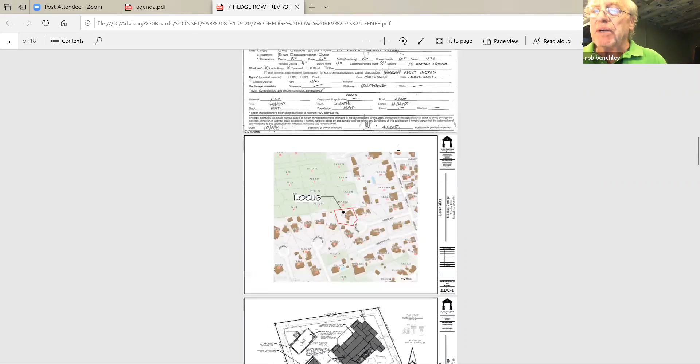We're moving on to... oh, this is an old agenda. The first order of business, which is... thank you. Mr. Chair, it's actually a new business agenda. Oh, it is, thank you. Yes, it's just mislabeled, apologies. I seem to have lost all the links that Kadeem sent me. I had printed them out, but I've lost them. So I'm going to be winging it here a little. Is this...?

It came from Kathy. Oh, okay, thank you, that's why I lost it too. Okay, thank you.

Lots of applications this week. Yes, we do. Fifteen. Ooh. Hedgerow. Oh, yeah.

Chair, can I make a motion to take the next application first? I believe he's waiting. Okay, absolutely.

Cottage... is that Cottage Ave? Yes, 8 Cottage Ave. Okay, good. And that's for the fence. Yep, yeah.

And this is... hi, it's Rob speaking. This is basically to replace or unify what's already there.

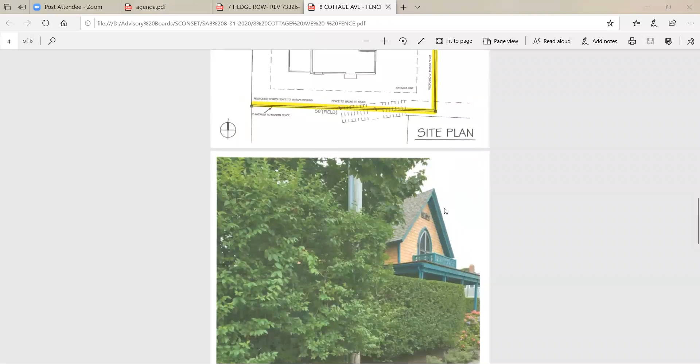You're right behind and next to the summer house, correct? Yes, that's correct. Thank you.

That seems reasonable to me. So it looks like it would be down this property line and this property line, and that property line? Oh, just the two property lines, okay.

Well, the other two property lines are on the streets, the two streets. So my question is, you can build a fence directly on a property line, is that correct?

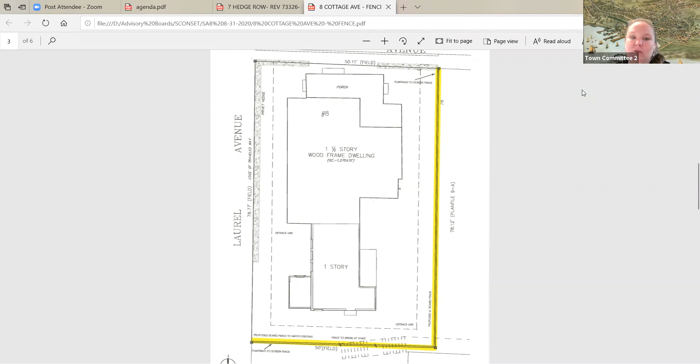So could you go essentially an inch off the property line? There's no setbacks off the property lines if that's what you're asking. Thank you, that's my question. You're quite welcome.

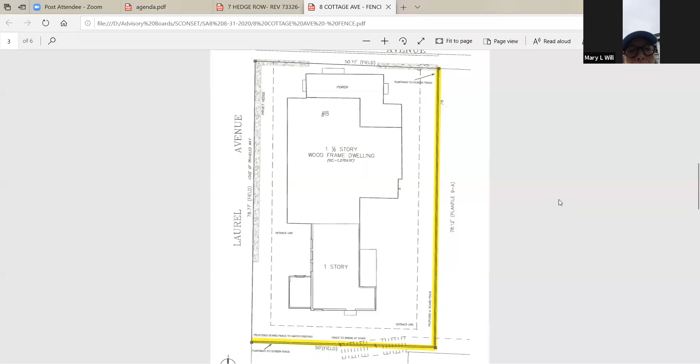How does this affect the path that's shown on the south lot line? That's a good question for the owner. Okay, so I'm sorry, I'm not sure what you mean by path.

There's a path that's shown. It looks like, or maybe it's something else, I'm not sure what that is. That is a staircase that leads into the second floor of the summer house for their dormitory housing. There is an easement that allows them to repair, maintain, or replace the stairs that cross over our property line.

Tom, I'm sorry, did you say that goes from the second to the third floor? It goes from the ground level to the second floor, where the employee dorm housing is. So how does that work with the fence there?

We would propose to bring the fence about halfway through there where it says fence to break at stair, and then probably pick it up under that first landing again and bring it back to the end of the property line, leaving some clearance space between the fence and the stairs so they could repair, maintain, or replace the stairs as the easement calls for.

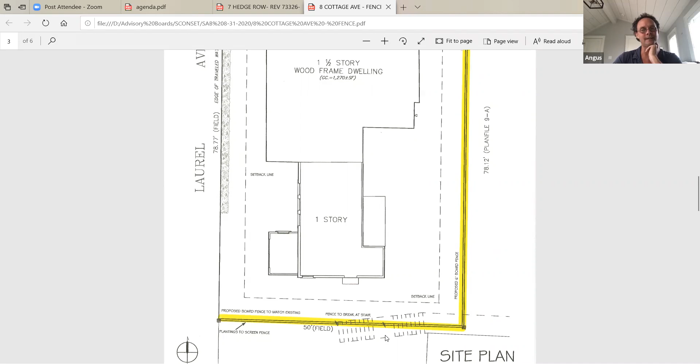We've got a quote from Nantucket Fencing Company, and I think the picture in your materials shows it as a lot more simple than what we would propose. We would propose to have caps on each of the posts, a board that runs along the top and bottom of the fence, and then caps on top of each of the posts.

That's what the fence builder quoted. I think it would behoove you to show exactly what you're going to put up, because I probably, like the rest of the board, assumed the fence would look exactly like this one, which is just a 1x6 plank fence with a gap. With what you're describing, I'd be happy to see a cap, but I think it's overdone to cap the posts.

Unfortunately, this was submitted before we got the quote in, where they told us exactly what they were planning to do. But if you mean by a cap, it's a horizontal board at the top of the fence and at the bottom of the fence. Is that what you mean by a cap?

Yeah, that's in what he has quoted, and as I said, some decorative tops for each of the posts. That top picture there shows the white picket fence beside the fence, that's on the screen now. The cap I'm referring to is what is on top of that white fence. It just covers the top of the fence boards, so it's not a rail, it's just a cap.

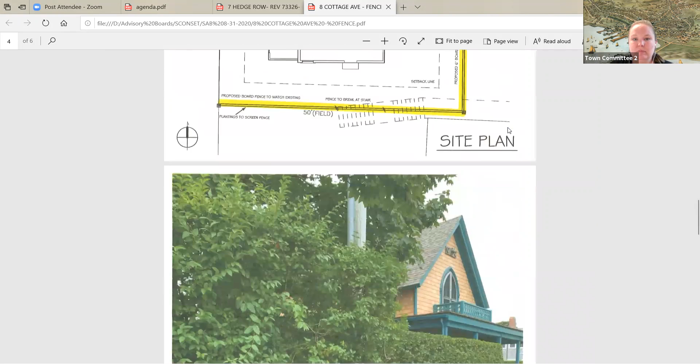I would recommend, if possible, and this obviously it's not going to help Sconset Advisory, but their comments would be, mention that. I would provide, if you can, some photographs of what this existing stair looks like, and email that to me so I can show that to the commission this evening, if we get to your part of the agenda.

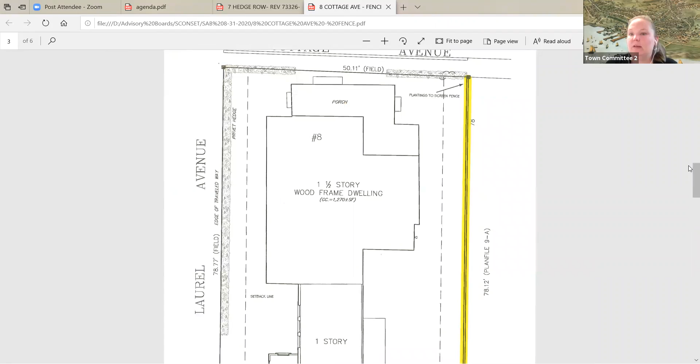Also, to the advisory board's comments about the fence, this obviously isn't what you're really wanting, so that should be clarified. And I don't see a detail. Usually there's an actual drawn detail of a proposed fence showing the elevation and details and all that stuff too. That would be beneficial if you get that from your company too. Okay, I'll get to work on that.

This is Caroline. Could I ask a question? Rob, could I ask a question? Oh, yeah, absolutely, sorry. It says plantings to screen fence within the yard? Yes, that would be within the yard.

So are you putting back the dead hedge? Well, actually, there is hedging there, so we may just build the fence on the outside of the hedging. It's well inside our property line.

Any other comments? This is Rob. Yeah, I would call this a defensive fence. Or I would say, this defense is a good place for a fence.

Yes, to defend and beautify. To defend and beautify. Perfect.

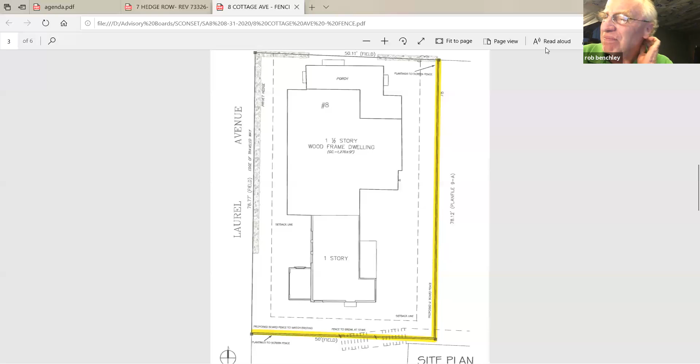Okay, then, Holly, I guess we have the right direction on this one, and we have no concerns. Thank you.

Provided there's a cap, right? Provided there's a cap. Right. Provided there's a cap.

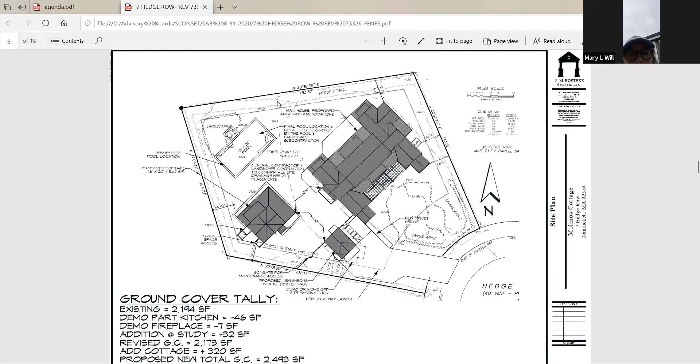Okay, so we'll go back to our first item, which is, it says 7 Hedge Road on the agenda, but I believe it's Hedge Row. And this is a revision for windows and some roof changes.

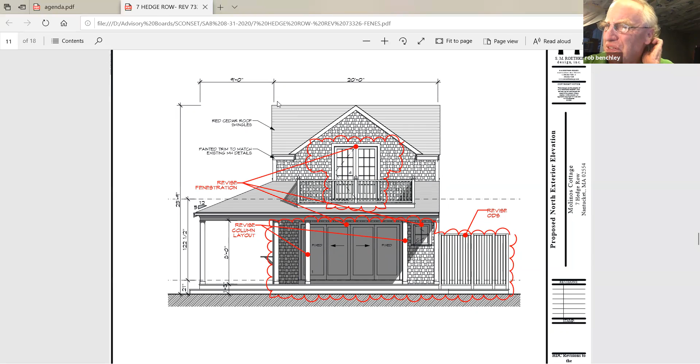And the original application, we looked at it this winter, I believe. Yeah. Okay, thank you.

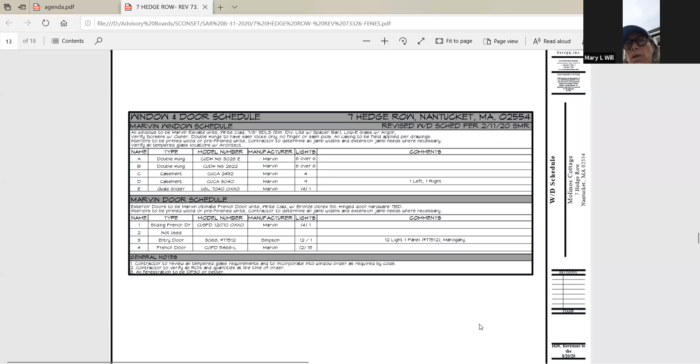We're looking at the cottage, I'm thinking. Is this the proposed one? I think this is the second building on the property, which is considerably larger than the original one. We talked about that at the time.

Is this a different applicant this time around? Do we have a different owner? I can only go by the agent, I don't know who the owner is without looking at the property line. This is Roethke. Oh, okay, so it is the Molinos. I thought I had a different name on it on the agenda, but that's all right.

I don't have a problem with the stoop or anything. That's fine.

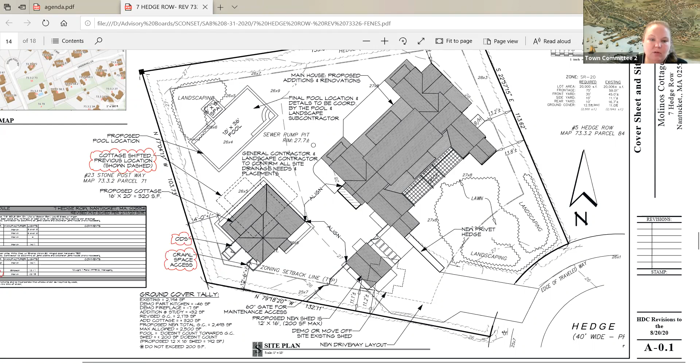So they've relocated it, you can see where it used to be. They're wanting to move it back into this corner. Yeah, away from their pool.

I don't see anything that stands out. This is Rob. Wasn't the application for window changes too, fenestration changes? I didn't see those. Yes, fenestration changes and a pent roof on that front elevation over the door.

Chair, this is Angus. I just have a concern about the windows. It looks like they're over the kitchen counter or something, and they look like single pane sliders. Yeah, ew. I'm not sure how visible they are, but that's extremely atypical.

This is Clement. I don't understand what that drawing even means. Are those sliding glass doors? They go all the way to the bottom.

This would be on the east elevation. Is that what we're looking at now? No, that's the north. Here. Oh, yeah, actually, are they? Oh yeah, they are, it says revised fenestration there.

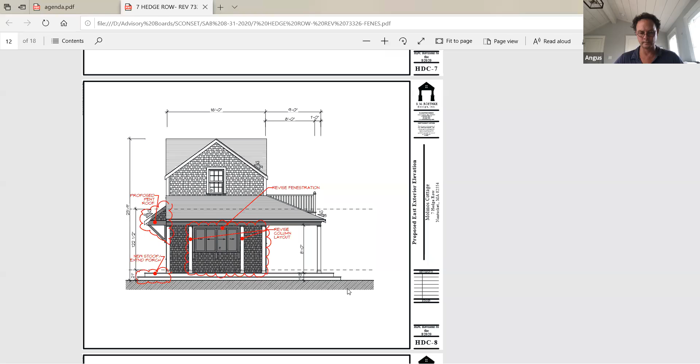Holly, do we know what was there before? Let's see what's in the packet. They should provide both, I think that's what they normally do at the end of the application.

It looks like a takeout window. Yeah, no, maybe it is. There's a little bracketed shelf outside the window when you look at the perspective view from the south. Oh, yeah, oh my God, it is a takeout window.

Is that facing the pool? Must be, so the grandchildren don't track in through the house when they come in for their lunch. Maybe a bar. Ugh.

Good eyes, Angus. Well, actually, wait, the pool side wouldn't be facing east in that location. East would be towards the ocean. Oh, yeah, actually it is, that is on the kind of pool side for them.

And then they went from these to... maybe, I don't know how the single light sliders got approved. I didn't think that was approvable, maybe because of lack of visibility. But both the sliding doors and windows bother me, they're just one big plate of glass. Agreed.

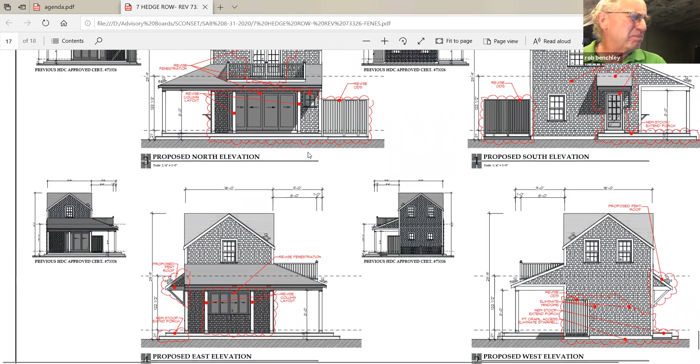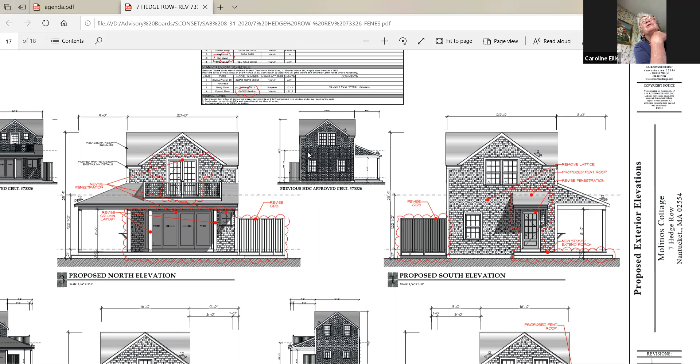But, well Caroline, they have a shelf and bar stools, so I don't know what other kind of window they could have. Oh, I see, do you see what I mean on the top drawing?

You can see little scallops of bar stools. I just don't know what other kind of window would work. Awnings would assure social distancing.

Oh, God. No, my concern is the single pane-ness, not the function of how they work. Okay, well then maybe that's what we should say. Should we suggest a multi-pane slider?

You want to guide you to what you want? Whatever light configuration would work with that, whether it's a 9 light or a 12 light or 4 light, something that would work with the other windows. Maybe 8 lights, 2 lights wide and 4 lights high, or 3 lights high, however the proportions work out.

Well, they've got 6/6s on the window above. These are kind of 2/3 the width of that, so it might work well to have 2 lights wide instead of 3 lights wide. Good. I think that's a good suggestion, Angus, myself.

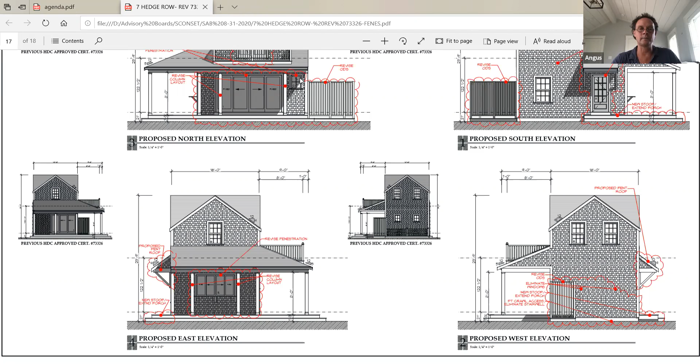So 4/4s. I mean, it'll look like that. It'll be what? It'll be 2 by 4, right? 2/2, right? It would be an 8 light casement, 2 lights wide, 4 lights high. Yeah, but not a casement, a slider. Right.

Hi, it's Rob here. I think those are great suggestions, and Holly, let's note that, please. And I'm also going to make a note that I've got all this stuff on my computer

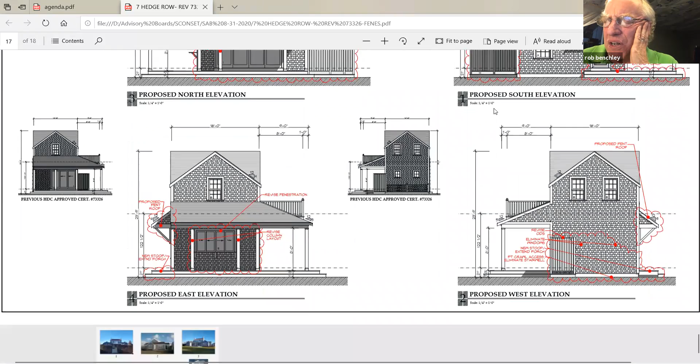That the applicants have submitted, and it takes forever for these images to load on the screen. And I'm just wondering, this is a bit of an aside, but I'm wondering if there's a way for them to technically flatten those PDFs before they post them. Angus, is that something that can happen? Can you flatten a PDF?

Because they've got a ton of layers on them and it takes 30 seconds for them to load. Possible. All I can say is, we receive them the way the applicants provide them, and we're lucky we get what we need for you all to look at and for staff to look at and the commission. Okay. So, all right, but I understand completely, because it looks like they're going directly from their software program instead of. Yeah, I know what you mean. It just takes them forever to load on my computer.

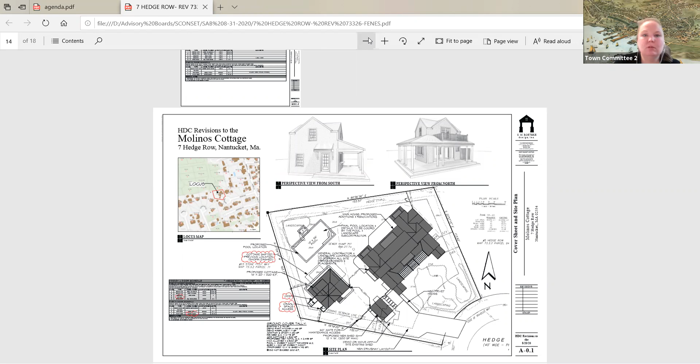Okay, so should we move on to 12 Lincoln? Sounds good. Everybody okay with that? Yep. Yeah. Thank you. Had to remember that there was a 12 Lincoln or a Lincoln out in Sconset. Yeah.

Minor window and door changes. They want to paint the chimney white. Remove a shingle railing on the back deck, outdoor shower, and extend front porch to end of building. God.

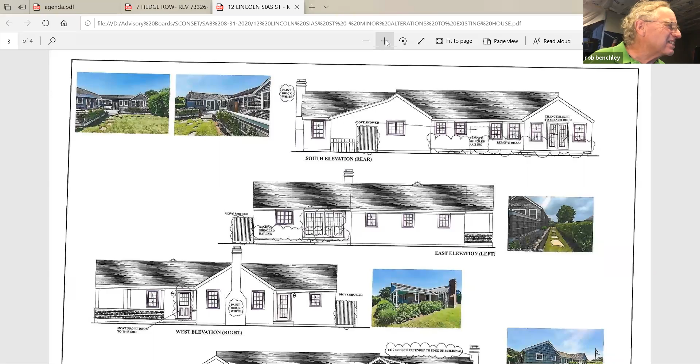All right, we'll take each elevation at a time. Move shower over here. Remove Bilco. Change slider to French. What y'all think about the south elevation?

Looking. Fine. Yeah, I appreciate the sliders turning to French. Yeah. I think it looks better without the shingled railing too.

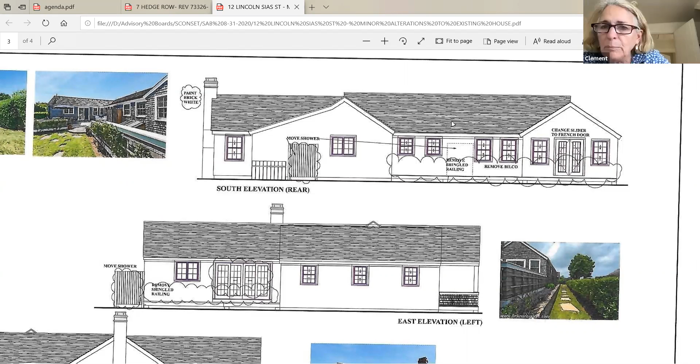I'm just trying to picture what of this is visible. I think none of it. None of it, yeah. Looks nice. It might just be visible from their son's house next door. That's probably the only thing.

Is that Sunset Ridge in the back? Uh-huh. Okay. Well, I think it's all good, and since it's not visible anyway, I don't mind the white chimney.

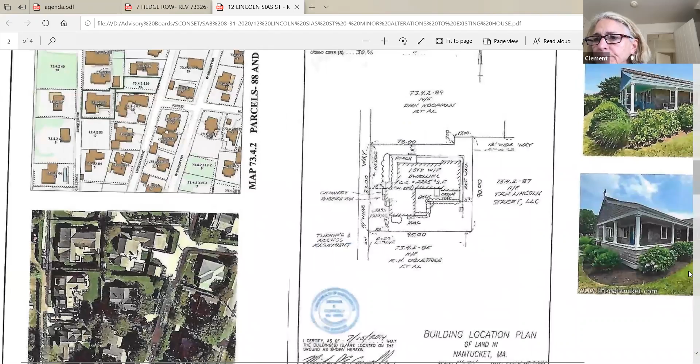No, not at all. Now, it does look like an improvement. Yeah. So no concerns? No concerns. No concerns. All right, thank you, board.

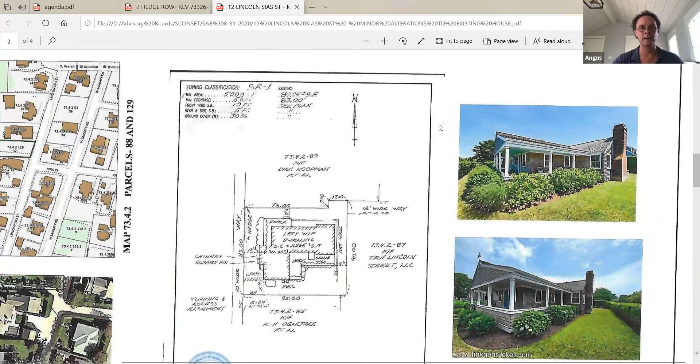I just have one question before we close it. It said remove front door or move front door. What is the front? And is it really not going to have a door? Like the east elevation is the front. So let's see.

Maybe not. I would have said the west was. That would make more sense. Oh, wait, that's the move front door to this side.

Yeah, that's where the front door is going, on the west side, which is the front door will then be on Sunset Ridge as opposed to Lincoln. That sounds good. I don't have any concerns. Okay, great. All right. Moving on.

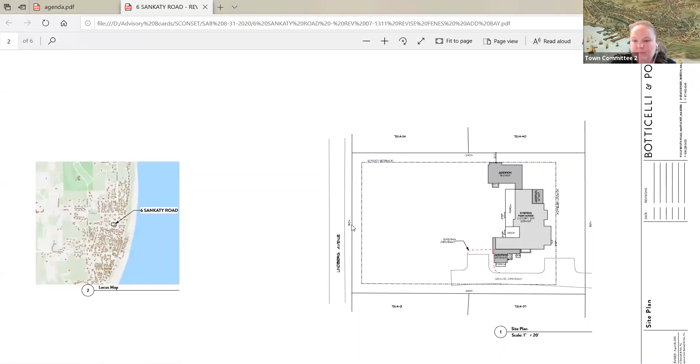Six Sankaty. Oh, this is the Goldstein House. Yeah. Oh, they did. Nice. God, it's frustrating.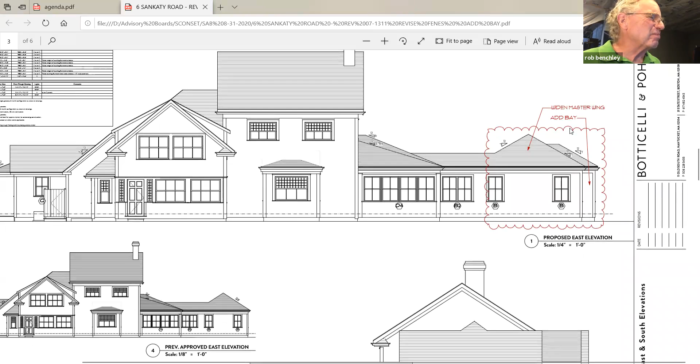They've added a bay here. Move the window. I think that's in keeping with what you all saw last with their changes. Yeah.

Was it now going to have a different roof? I think that was on the back side. I think on the south elevation, we had suggested doing a hip roof for where that gable is, just because nearly all the subordinate roofs are hips. Right.

I don't know if they forgot to try it or tried it and it didn't work, but it was discussed with the commission. How was the review? It was good, but what they finally approved, don't ask me, that was a while ago. Sorry. I can't remember them all. But no, it was discussed, and Lisa even brought that up too during the discussion.

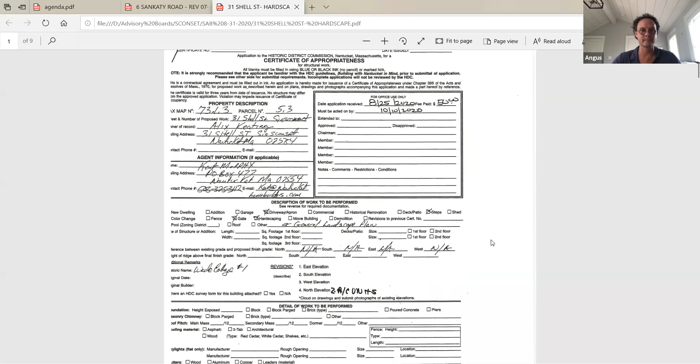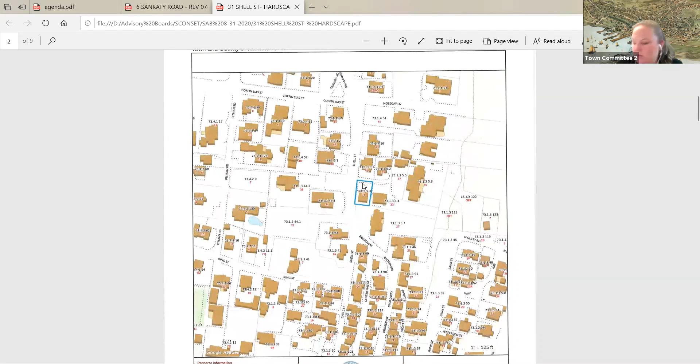Very nice. Yay, lucky them. 31 Shell. Steps and hardscaping.

31 Shell, there it is. Yeah, they're already putting that hedge in. It looks good. It's so close to the road. It's too close to the road. It is, it's so close. Very dangerous. That corner is so close already.

There'll be no place to jump in the bushes when the cars come around the corner, but it does go over the yellow line, I do believe. It's just too close. I think it's really bad.

Well, the thing is, they've got to have a car park somewhere, right? And it looks like this is the most logical place. It's farther from the curve than the previous car park. And it's right by the turn for Wade Cottages. It is a problem, Mary, though, of the car.

The problem is with the hedge. Well, from my point of view, that's what I think is that the hedge has been placed so close to the side of the road that as it expands and grows, it's going to go out onto the road. Good point. Be more dangerous for a car exiting that property.

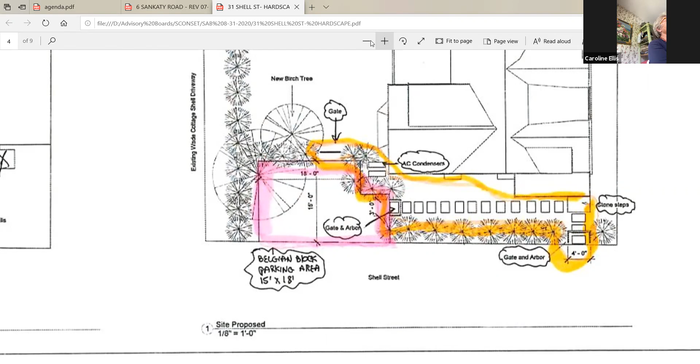It needs to be moved in. It's just terrible. I just walked that street, and it's almost as if they had to jackhammer some of the street to fit that hedge in. Exactly. It is. Yeah, see, there's the old hedge. There was grass, and there was grass. There's nothing now. The new hedge comes right out to where that sand path is.

Really? Right. I don't think any fire engine or anything can get through there. Well, and fire trucks certainly go. No, well, I'm just thinking of safety. I mean, when you walk, that's dangerous. Yeah, exactly.

Hi, it's Rob here. This is kind of a critical corner, and we all know what it's been like since they started the construction there. And I think because it is such a critical corner, it would be nice if they would submit photographs as it is now, along with these of what it was, because it really is a traffic issue, and I appreciate the fact that their property line goes right down to the street.

However, that's a very congested place, and I realize that we're not the traffic safety committee, but it's a free country and we can say what we want, so far. But anyway...

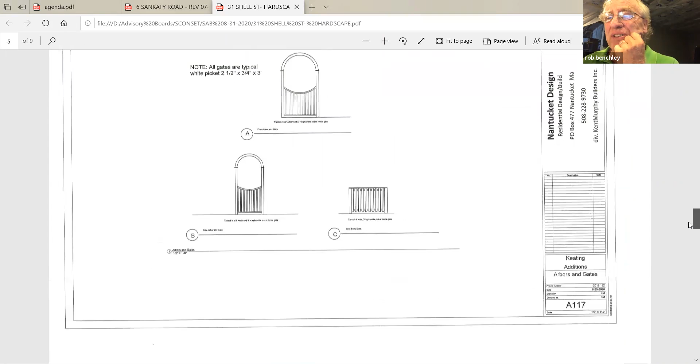It would be nice. Yeah, I mean, it's probably not a huge application, but it would be great if they could submit photographs as they are, so people like us and the commission itself could make an educated decision based on the way it is now, because those are old photographs, as we know.

And I realize that, yep, okay, well, there's that. And you can see it goes right down to the street. And it's pretty congested as it is. I don't know if that's even in our purview, but...

I guess it looks okay, but they're creating an additional hazard, and I will put a footnote on it as far as the parking goes. This is why the town should have never sold that lot adjoining this building, because it was parking.

And it has some nice street, the Hakes lot. No, yeah, behind number 5. Yeah, correct. So does anyone have an issue with the parking or the gate? Yes. Okay. I was just hearing about the planting. Yeah, I think the parking is dangerous.

Well, it forces you to back out if you're going to pull in. Otherwise, you have to do a 3-point and just back into your spot, which I guess is the safest thing. It's a precarious corner just driving on, let alone pulling in and out of. It's not very pretty either to be walking by there and see the parking area.

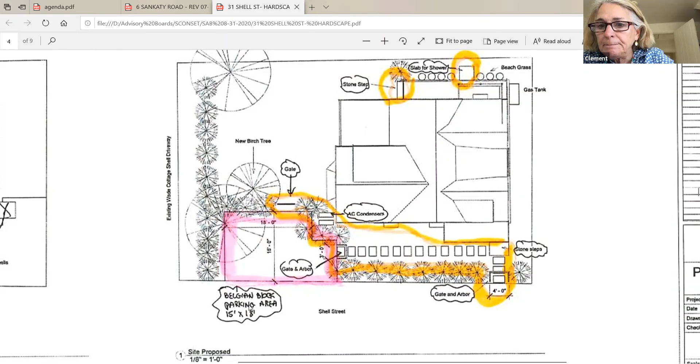Now here's another thing - we're dealing with an existing shell, Street is shell, correct? No, it's paved. Okay, yeah, it's paved. So when you have a driveway against a paved street, you have to have an apron. It's existing shell right now, but the way I read this entire parking area, they're proposing it to be Belgian block, 15 by 18, right? That's a lot of Belgian block. Yes it is, so that's just another thing to think about outside of a zoning perspective.

Can it also only be 15 feet deep, for aesthetics? I mean, aren't most cars 16, 17, 18 feet? Usually head-in spaces are a little bit - what's that say on there? 15 feet is about average, I'd say, for head-in parking spaces. This looks like it's going to be almost 2.

I mean, it's very unclear for me to see what this is proposing. I was trying to see if there's anything else on here - bike and a car, I think, maybe a bike here, but they're definitely head-in parking spaces perpendicular with the road, not parallel. So if we're proposing parallel, that would create maybe just one parking space. I don't see how you could do 2 parallel parking spaces.

As far as the Belgian block, what's in front of, like across the street? Is that a Belgian block apron at Belichick's and the Petite Cottage? Yeah, yes. Does it go very deep? Is it like 6 feet deep? I'm just thinking, I'm hearing Holly's concern about the extent of the block, and it almost looked - depending on how much you use, if you do a 6 or 8 foot apron, then it might just look like 2 stripes, one of shell and one of Belgian block.

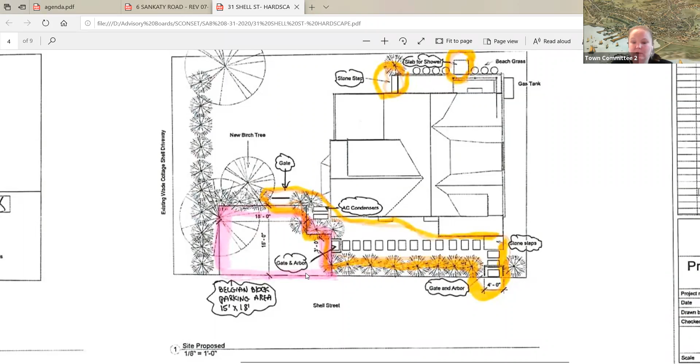There's no driveway there now, Holly. Oh, it isn't? It's just dirt. No, it used to be the front yard. The driveway was where this arbor and the hedges are. So these photographs, yeah, there's the driveway, it used to be. It's really a parking area. It was right at the end of the house, which would be the south end. They are proposing a north end parking area.

Okay, so if they weren't going to mess with this, it'd be fine. It would be the fact that they have no apron. Now that they're wanting to reconfigure, they have to have an apron per the bylaw. So, I'm just assuming the Hakes gave them a place for Susie to park on the south side. And once Susie had died, then it was just pushed back. But there never really was any parking on that property.

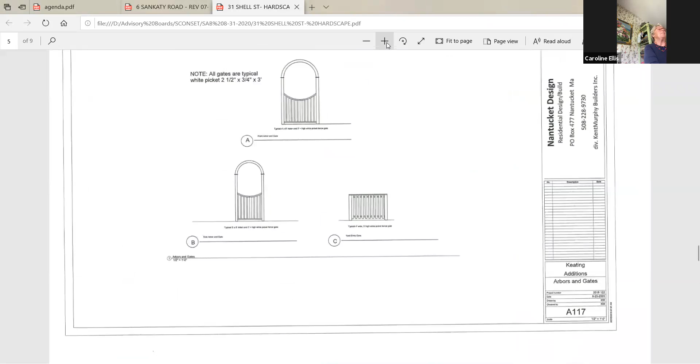Well, the house grew, right, by 4 feet or something? Mm-hmm, the house grew, yes. So I would propose, if possible, doing it parallel, no matter what. It sounds like any sort of transition achieved in an apron would cover such a significant portion that it might make sense for it all to be the same material. But I would suggest cobblestone instead of Belgian block, so it would be a little less formal, since there's so much of it.

And it could go forward because the tree hasn't been planted, right? They're proposing a birch tree. You could put your car there if you did it perpendicular to the road. Oh, going in deeper. Right, just go forward.

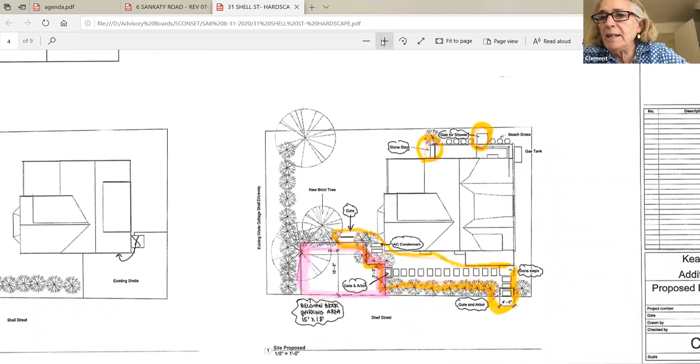Well, of course, they're trying to have some yard there. Not our problem, I understand. I just think that they're trying to do too many things with a small lot.

And you could still make it charming. It is charming, their improvements have been wonderful. But you can see where they've got the stone steps, they've got the hedgerow on the right side of what we're looking at now. This little portion is a little porch that they added. Right, that's now the front door. So they added that porch, which narrows that space, which if you want to do stone steps and a hedge, you're really tight to Shell Street, which once again is not our problem.

But that's why they've got it laid out like that. I understand why they have it laid out like that.

And you can also do those parking areas. I'm looking out my window, and over at Barnegan, they have the Belgian blocks for where your tires go, and then it's grass in the middle. Right, so that's more attractive than just a solid Belgian block.

Or maybe by doing it in this strange shape, they're hoping that they can actually do a turnaround, sort of. I mean, it won't be just strictly pull in. Well, it may be parallel parking. Oh, yeah, it might be. It could be the T part, from when you pull in and then you're backing out. Sometimes you can do a T or an L, I should say. Might be what they're doing.

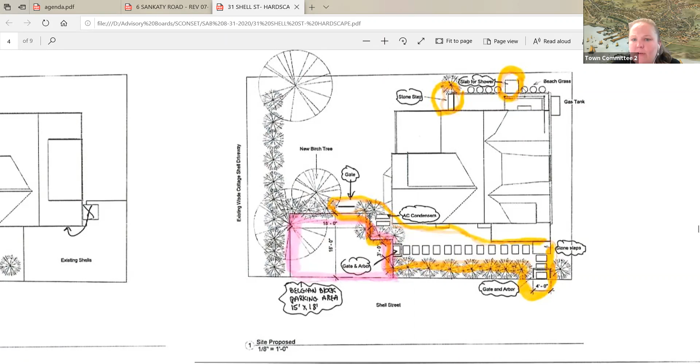What are your comments on the other aspects, the gate and the stone steps? And I guess a slab for a shower. Do we see the stone steps? No, let's check this out. They're just on the ground. I'm kind of concerned with them wanting privacy, but our concern is the encroachment on the road.

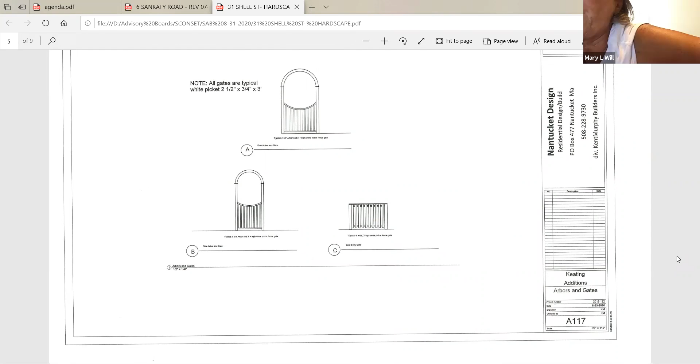Right, the hedges that might start out as 3 feet easily get to be 6 and 8 feet. I would suggest that the stepping stones go alongside the house and that the hedge can go where the stepping stones are. I would also offer, this is Mary, that hedging is something we would like to discourage because A, it will grow, B, it will require landscapers, and to have more landscapers parking where there's a yellow line anyway, which they do, they just park there all the time.

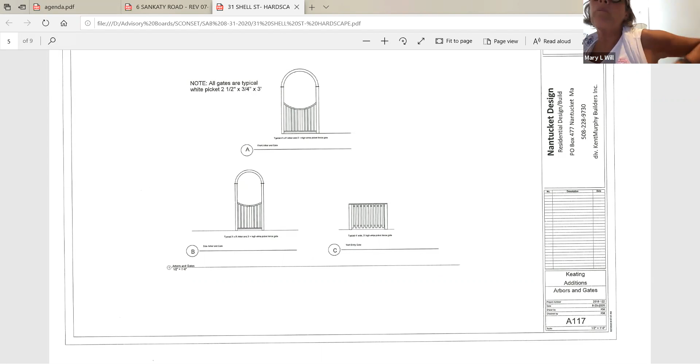It's just not a good plan. So if anything, just go with native grasses or something, that make a wonderful hedge in the summer. And they don't take up the same space and they don't require the same amount of landscaping.

Hedges are noisy because once you plant them, it brings on all the machines. But that's not what I care about, I just don't want them where they are. I think the suggestion to eliminate the steps and put the hedge there is great, it gives them privacy. Get rid of the steps, walk along the side of the house.

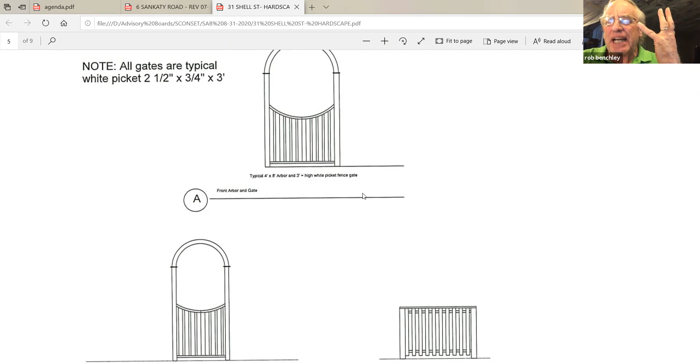This is Rob. It feels like they're inhaling so much, they're expanding out beyond the space that they have, because it's going to go beyond their property line as the hedge grows, with plantings and a little flower bed on the street side of the hedge. And it's a terrible corner. I appreciate that they've got the property line and are allowed to do what they can do, but that lot was a problem when they bought it.

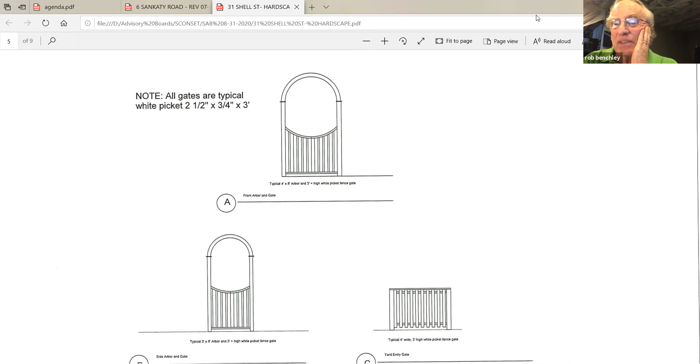I think it would be nice if they would be neighborly and reconsider this entire layout, because it just feels too compressed, too much in one limited space. I seriously worry about the safety issues there, and that's really where I'm going. That's the main issue.

Issues on the type of fence and the gate that was proposed, the arbor? No, no, no.

Mary's moved inside. I had to, my computer shut down because it got too hot, then I had to stick it in the freezer, so I was offline for a lot of this discussion. Oh dear. How funny. Yeah, funny, the things we do, right?

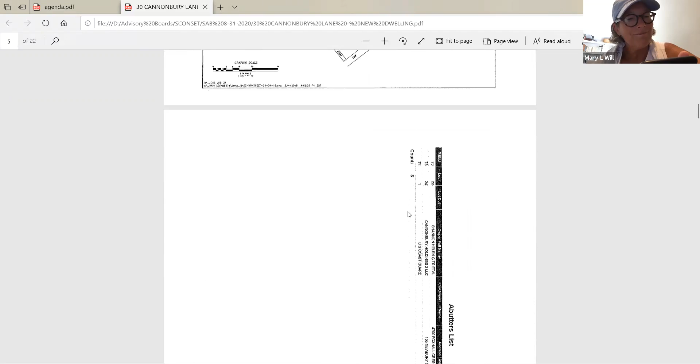All right, you all remember Cannonbury? Oh, very well, yeah. You knew it wasn't gonna stay vacant forever, right? Yeah, we hoped it would just go away. What are we going to, no, Fleet Wing Circle?

This is 30 Cannonbury, which I didn't realize these are black and white, that's not fun. So this is for a new dwelling. Why are we not getting to a new dwelling here?

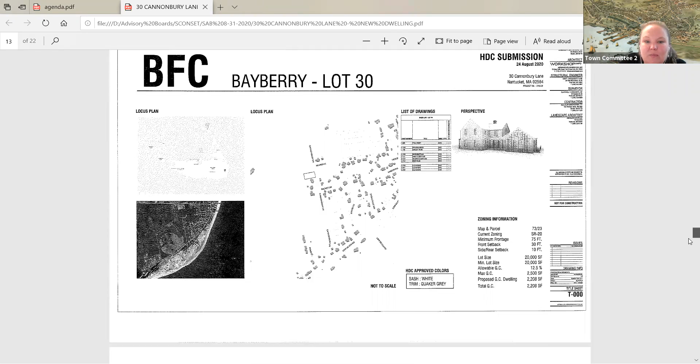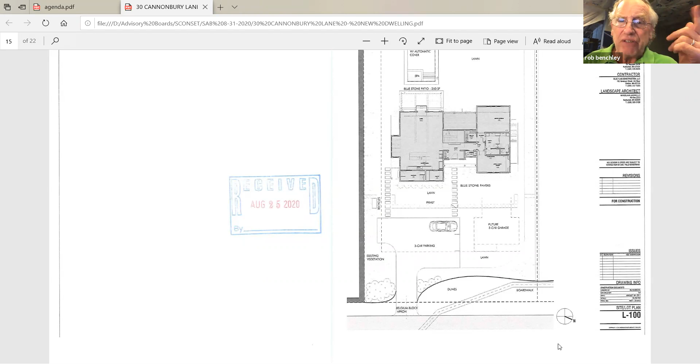Okay, lot 30, Bayberry, yes. All right, here's your site plan. And Holly, this is Rob, I have a question that you may know the answer to, and it applies to all of the Cannonbury applications, these and also the ones that we're going to get. When they were proposing their little beach club there, or their community pool thing, did that go through?

No, the neighbors were all up in arms against the community pools, so now every one of these houses has a new pool. Well, they are allowed to have it, they were allowed to have a pool before all of this came up. Correct, each property was allowed to have a pool. The developers thought it would be in their best interest and they could sell the remaining lots more quickly if they had an amenities location. And they do have something now, kind of two little buildings linked by a breezeway, it's a library and a yoga room, that's the amenity package.

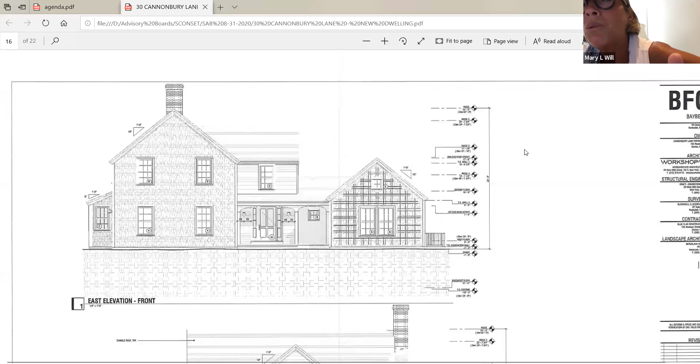That's the new amenity package. But the old amenity package was the pool, and the idea was, oh it's going to be too much of an attractive nuisance, too much noise and everything else. Well instead, we're going to get 57 new pools. Yep, and that's how much landscaping and pool maintenance and all the trucks down there that you're going to need for each and every one of these pools. You know, bite your nose, spite your face.

Okay, so thank you for that, so my question's been answered. No on the club pool. Okay, but they do have sand dunes in there now, so let's remember that, that's an amenity too, with beach grass. Okay, so this is a new dwelling, and where is lot 30, please?

On the first black and white picture, it shows it in the very top northeast corner, but then you scroll down and it shows it more centrally located. So it's a little deceptive. Can't read the numbers. Yeah, I can't either. It's lot 30.

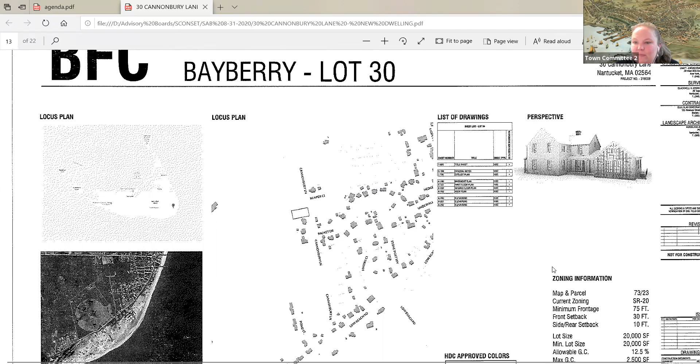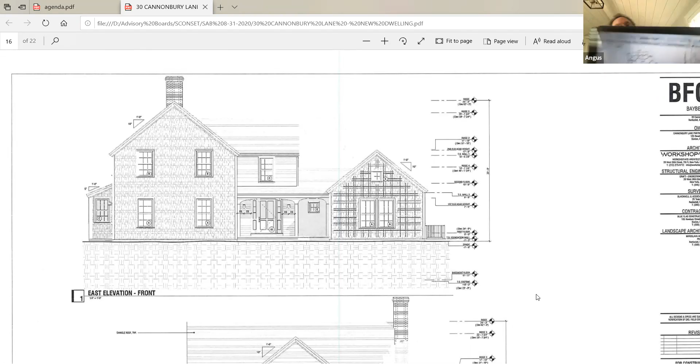I will agree, this is a really crappy version to try to review digitally. Yeah, no kidding. Do you all have this picture? Yes.

Do you see 30 is like up at the very top here? Down by Westerwick Circle? But then in the lower parts, it doesn't, like the lot that they're showing. See at the end of the circle there? Is everything on its side? Yes. Okay, I thought it was me. I can't even read it. I can't either.

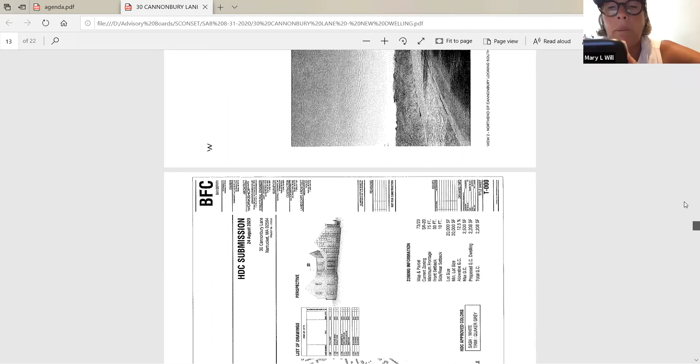Do they give us a locus map? And the plot plan of the whole thing is upside down. The writing is upside down. My plot plan's illegible. I don't even see a regular locus from our GIS in here. Am I missing that? Yeah, it's not there. And then this plan shows it more towards the ocean side.

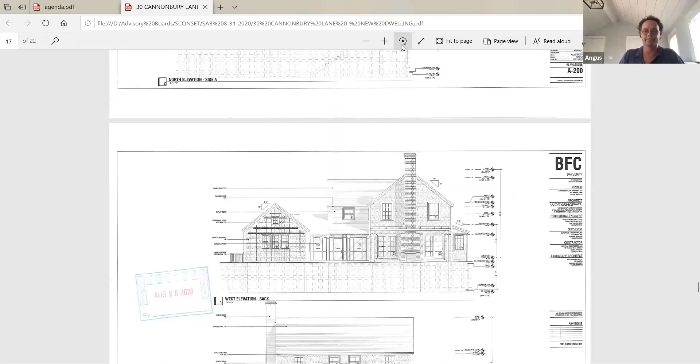30 Cannonbury. The house itself looks okay, I think. Suburban. I don't see a pool application. No, this one seems to just have a house and it says a future garage.

And also, I just looked on the GIS. The lot is centrally located, so almost diagonally across from Reaper Circle, on the left-hand side as you're going in. So basically, this direction's facing. Oh, is that a pool out back? Place for a future pool? Yep. Oh, and a future cabana.

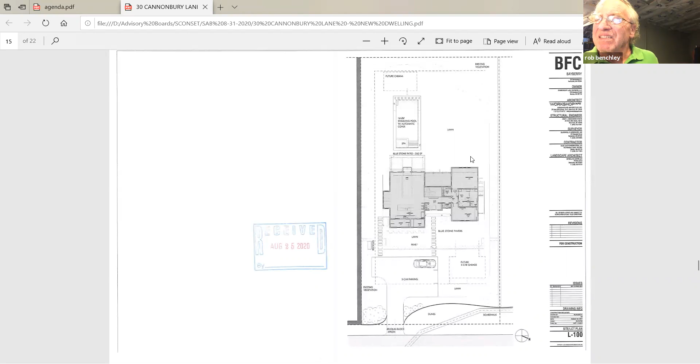Quaint. Well, I'm sorry, can you go back, Holly? So that solid gray line, is that Cannonbury? This is Cannonbury right here. Oh, that's Cannonbury, okay, thank you. Yeah, that's a lot line for some reason. That's a lot line.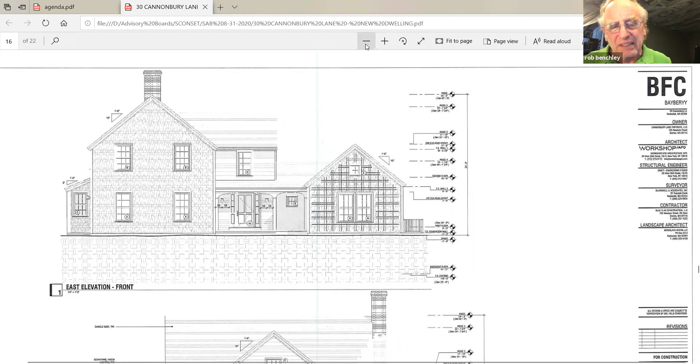I realized that this whole street is taking on its own character, and it's not a thoroughfare and everything, but do we want to ask them to ditch the side lights, just the suburbia part of it? Or are we gonna just let it slide? I don't know. It's a weird dwelling, it's like a farmhouse look, but you've got the wrong side of the farmhouse turned towards the street.

Well, the east elevation, it says it's the front, but I mean, east faces the beach, not Cannonbury Lane, doesn't it? Or am I? Yeah, when you've gotten down that far, you're kind of turned a little bit. Okay, so east is a little confusing. East does front Cannonbury. Yeah, so east is actually northeast relative to the shoreline. So is it on the left side of the road then? Yes, okay, thank you.

Looks like a Royal Barry Wills. Do you remember those houses? Yes, it does. And those are actually nice, but this isn't like the place for those. Royal Barry Wills typically is best on land which has different grades for different parts of the house, and this is all just flat land. The back is better than the front, I would say. I can't read the front. I'm sorry.

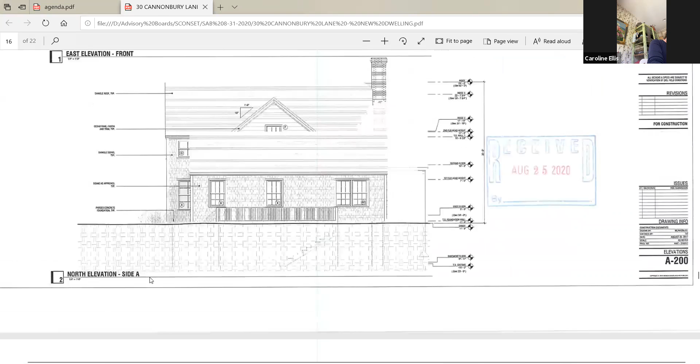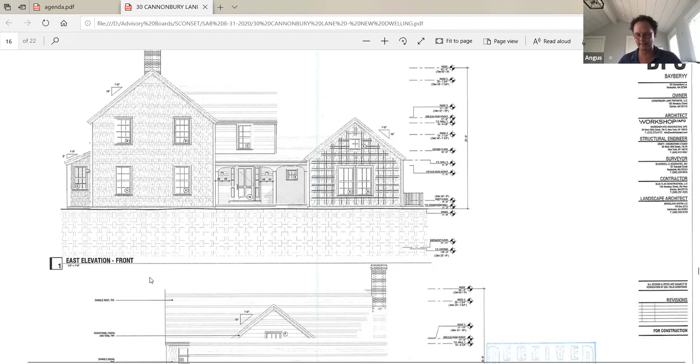I'm a little confused, aren't we reviewing 7 Bayberry? I think Bayberry is the name of the design. I think they have a couple different models of houses, and this might be the Bayberry cottage design, that's just a guess. Probably right.

The house I'm looking at at 7 Bayberry is like that. This is 30 Cannonbury. Oh, 30 Cannonbury, excuse me. All right, in the same subdivision. We can't be looking at the same thing here.

They don't have a Bayberry street down there. I think it's the name of the cottage design. I think the developers are presenting people with some number of possible designs, which maybe is why, yeah, see it says BFC Bayberry. So this might be one of their approved designs, and I assume they're presenting to the buyers that this is one of their approved designs to go on Cannonbury. No idea.

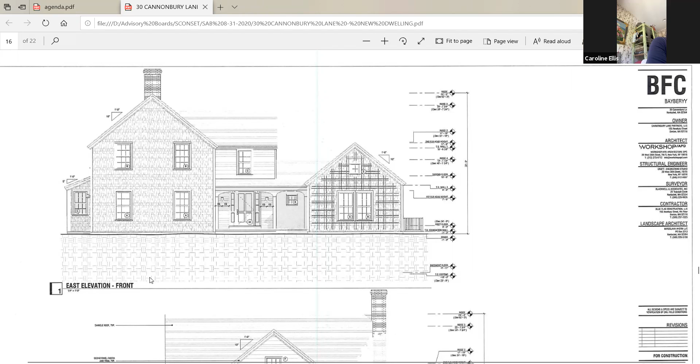And if it's the same developer that did the one that begins with an H out there on Hummock Pond Road. Yes, it is, and a lot of those houses have that combo kind of barn siding and shingles. So looking at this east elevation front, it looks like right over the front door and the next second story, it looks straight across. So is that clapboard, cedar siding? Clapboarding, yeah.

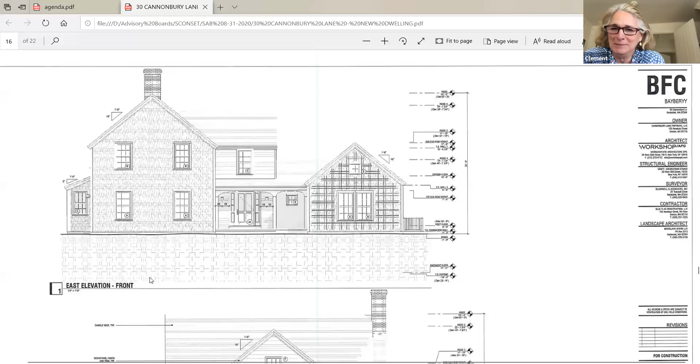Or are those the boards. I love that Hummock Pond, and there's no privet there. There will be, there will be, Caroline. No, there won't. All the plantings without privet, it's very private. I mean, I just can't read it because I feel like the plans just aren't coming through, like there's a lot that's just sort of scanned out and it's hard to see the plans.

I agree, can we hold this until there are clear pictures? That will be up to the HDC themselves, they may have the same conditions. Let's take a look at the other ones that they submitted. It might be an issue with the actual applicants. In the interest of time too, guys, we may need to get some comments in via email, if you all wouldn't mind that.

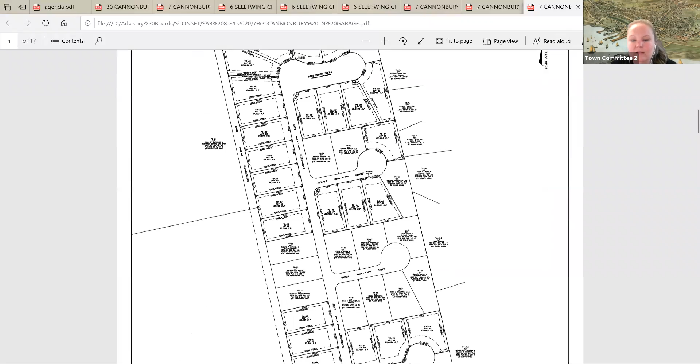This one seems better. This one is for 7 Cannonbury. All this stuff in that. See, now this one is actually in color, where the other one was not. That's the one I was looking at before.

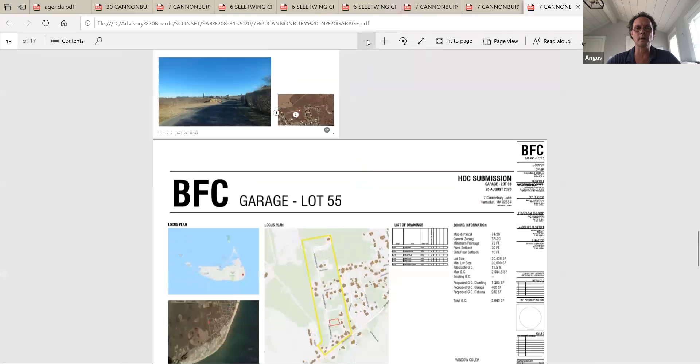Okay, very pretty, but it has a lot of the same specs on it, same pictures, same plot plan. And that whole long thing, number 30, the lot number 30 was all the way at the end. Okay, it's actually right here, one of those two. I think it's this one.

Okay, so just because I haven't been with you all, since you've looked at these, is this the first time you've seen these? Yes, yes, for new, okay. So I would assume, but I don't really want to assume, that the developer and the architect are going to be asking for packages, if you will, like the Bayberry or whatever this one's called, kind of what they did with the other subdivision off of Hummock Pond, I'm assuming.

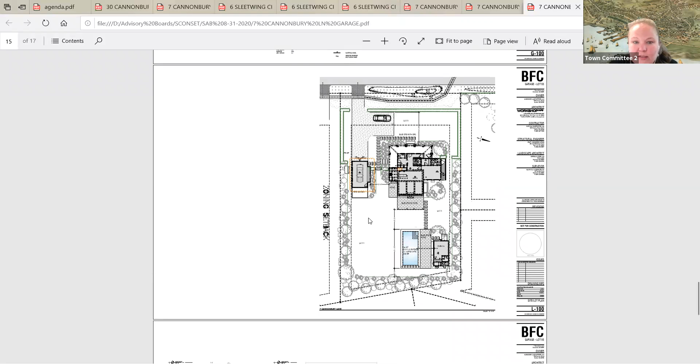But right, so this is the lot. Oh, I guess this is for the garage, a 1-car garage. For those other ones, modular, I can't remember. The ones off of Hummock Pond, I don't believe so. Or stick, okay, I think they're all stick built.

The two that went in down in this Cannonbury development last year were modular, but that's just because they chose to do that. They bought the lots and then put their own modulars on them. They bought them outright, yeah. Okay, yeah.

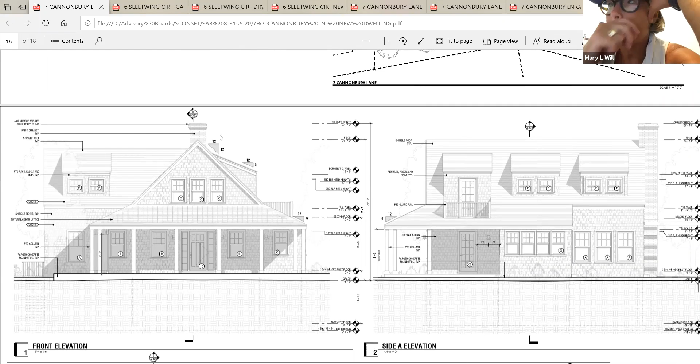So this scan seems to be better. This is the Eden Rose. Oh, this looks like Blackfish, that looks like a house on Blackfish. But it's their Eden Rose model. I see. A little more interesting, actually.

Are we going to discuss this one now? Do you all want to look at the garage application? Yeah, the first one that I showed you was the garage.

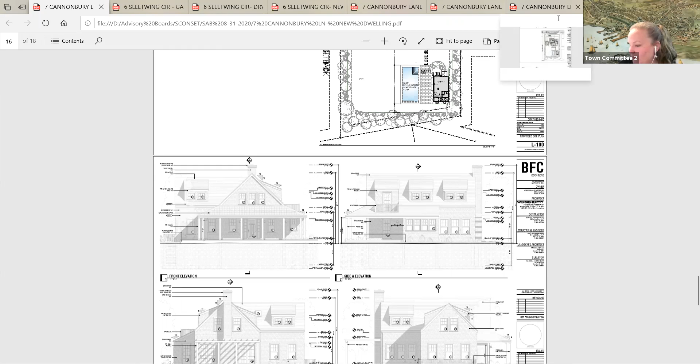Yeah, and correct, we've got historic structures at one. So, and of course we're over time - I didn't realize we had 15 applications. So what do you all think?

Technically, you've got 3 more properties: 7 Cannonbury, 4 Sleetwing Circle, and 6 Sleetwing Circle, with new house, new garage, new cabana, and pool, and some hardscaping. It seems to be not every single one of them, but that's what you've got. I appreciate you, Caroline, catching the model names, because that's what I'm thinking.

They're wanting to have models approved, or a package to come in and say, hey, we want one of these, and then change as they need to with a particular customer. So I would pay attention to that.

But yes, I would respectfully request, if you all wouldn't mind, for these next 7 through 15 on the agenda, to email me comments individually, and I will get them to the commission tonight, because I believe these are on the agenda tonight. Now, I will give you a caveat - these are at the end of the agenda, and it's going to be a long one. So there's a possibility it will be continued to later in the week, but I wouldn't want to assume that. So just to let you know.

I'll let you make a decision here. Holly, in deference to your schedule, I'm going to ask our other members if you're okay with doing that. Am I under the understanding that these would come back to us individually? I'm not sure, once they're... because this is the corporation setting this out.

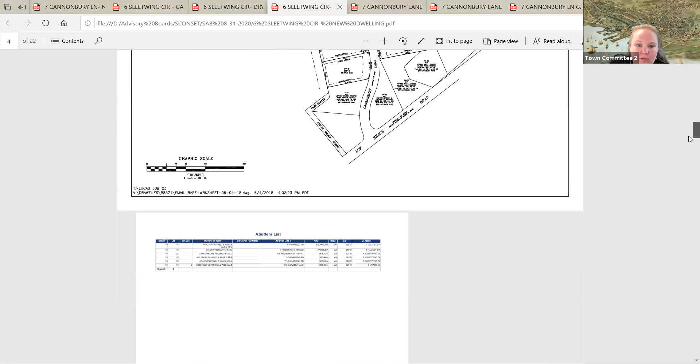I think the first one we looked at was the only one that's not legible, the 30 Cannonbury. It looks like all of these are, but again, I will bring that up with the agent for this. Yeah, these are a lot more clear. But that's noted, I completely understand.

It would be great if we could have more time to look at these, as opposed to rushing without having the time. It feels like sort of a blanket approval of 5 potential houses, which is a lot. I think we need the developer to come and speak with us to tell us what's the plan and how many designs are there and what are we looking at, and take the time rather than rush us so that they can get what they want.

And I just, Mary, on that point, it's not them that are rushing you. It's me, because we got HSAB at 1:00 and I've got a couple other things I need to do beforehand. It's this format. Obviously if we had more time, we wouldn't be having this discussion. So, but no, duly noted. That's why I wanted to let you know that they are on the agenda tonight for the HDC.

However, they have a 4-page agenda tonight, so they might not get to it, they're literally number 41 and 50 on the agenda. Oh yeah, it'll probably be till 9:30 tonight. So there's a possibility that these applications will be held over, probably till the 3rd, which is our next scheduled meeting already, on Thursday. Those haven't been long meetings, so I don't even know if they'll get to them.